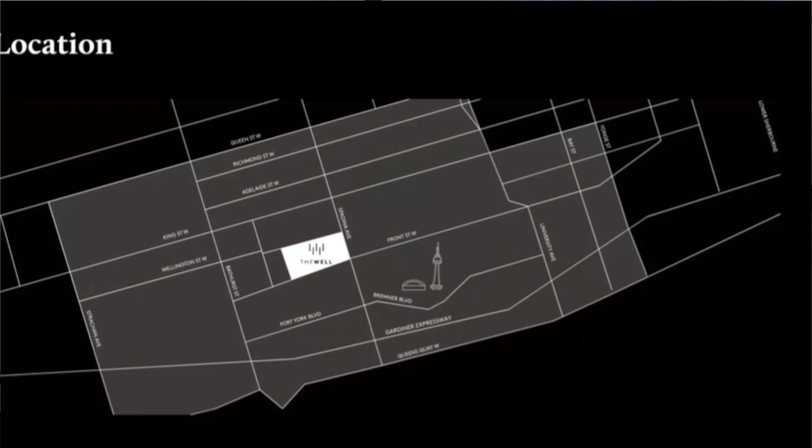That all ties into the amount of people that were involved to make this what it is, not just from an ownership standpoint, but also consultants; to make all this work together was incredible. So at a high level, The Well is located in Toronto, right at the intersection of Spadina and Front, just a little bit west of the main downtown core.

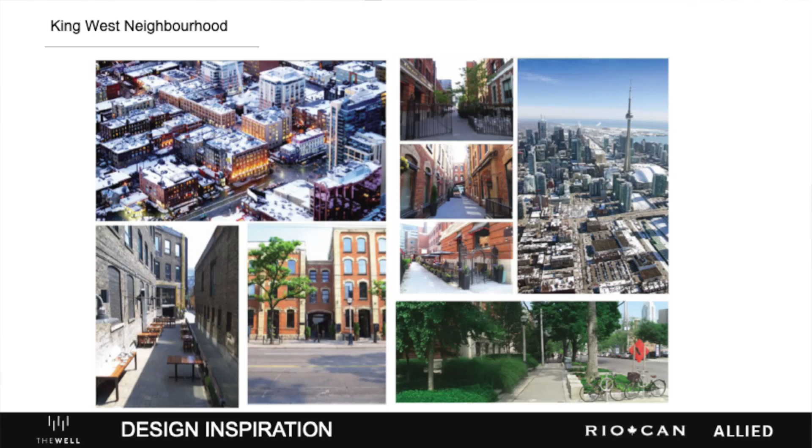The King West neighborhood is really defined by these former industrial blocks, hidden laneways, exterior terraces, this real post and beam type architecture. Our goal was to bring the flavor of this neighborhood into The Well, and The Well would act as a bookend for this neighborhood. We wanted to define exactly what we don't want to be. We were not the financial district of the city.

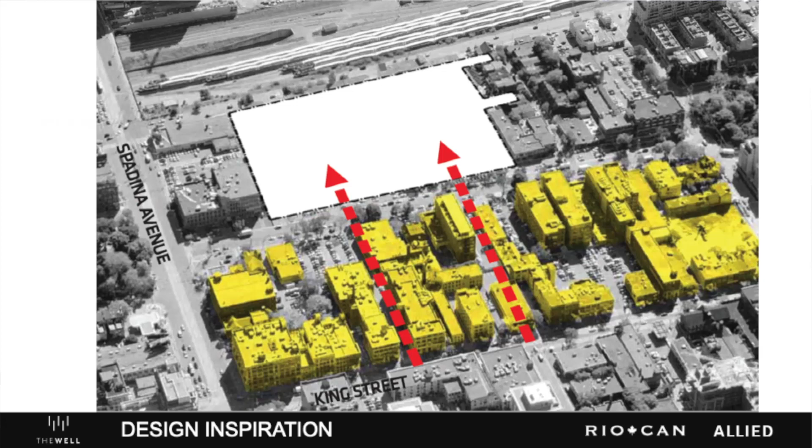This locale has a lot of character, and you could see it with the type of architecture in these buildings. So with all the little laneways, terraces and patios, we wanted to bring that all into The Well. And our goal was to not make The Well a community that's isolated in and of itself, but more of an extension to this King West community.

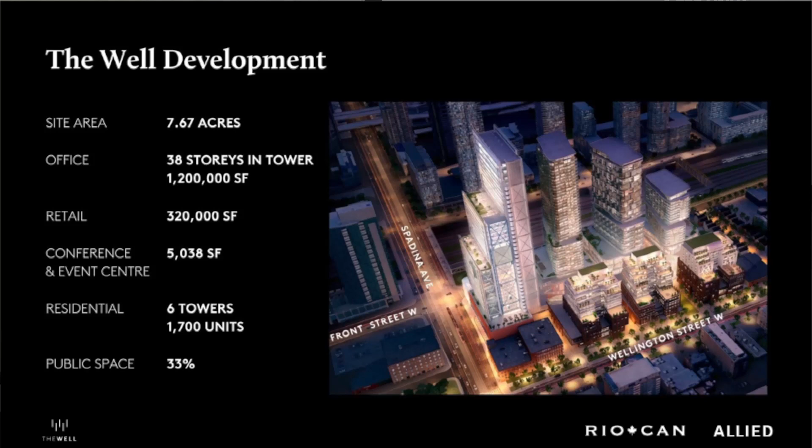Now, overall, it's a really large site. This actually, prior to what it is today, was the land of the Globe and Mail. They were a big publisher, a big newspaper out of Toronto. The land itself was almost 8 acres.

All the podiums that you see throughout the campus here are all commercial. On top of those commercial podiums, there are these residential towers. And you can see here, along this side, that is actually where King West comes right through and meets the Well. Along Wellington Street, those are more of the low-rise brick and beam style buildings. And as you move into the southern half of the site, you get into this open space where there's all the retail and open public realm.

So as far as the office goes, this large tower here on the very left is a 38-story office tower. All office, topped by a rooftop restaurant, actually. The retail area is 3 levels of retail, and I'll go into more detail on how that's all spread out, because there's 320,000 square feet of it, along with a 70,000 square foot market. And the residential piece of this is close to 1.2 million square feet as well, spread out between 6 towers. 3 of those towers are rentals, and 3 of those towers are condominiums.

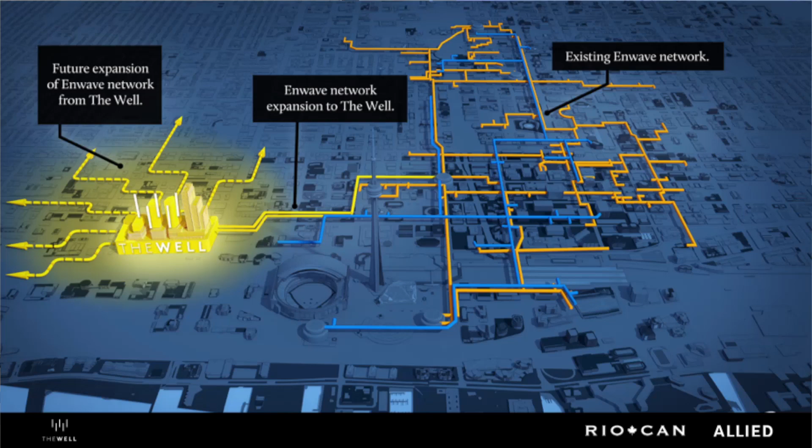One of the unique features of this site is we formed very early on a partnership with Enwave. Enwave is a utility in Toronto, and they service maybe 200 buildings now in the downtown core. They have infrastructure, and what they do is they have a deep lake water cooling system. So they have pipes that run 5 kilometers out into Lake Ontario, about 80 or so meters deep, pulling cold water from the lake to their plant, where it's then distributed and helps to cool a lot of the buildings around the city.

Now the Well, our partnership with Enwave acted as a western expansion to their entire infrastructure network. So there was massive work done with Enwave to bring their infrastructure west, and the Well acts as a node, a separate plant for Enwave for their western expansion. So within the Well, below the lowest level, there's another 180 feet down that we went, and it's a massive storage tank. It acts as a big thermal battery, and it will ultimately help to supply their future needs for expansion to other buildings.

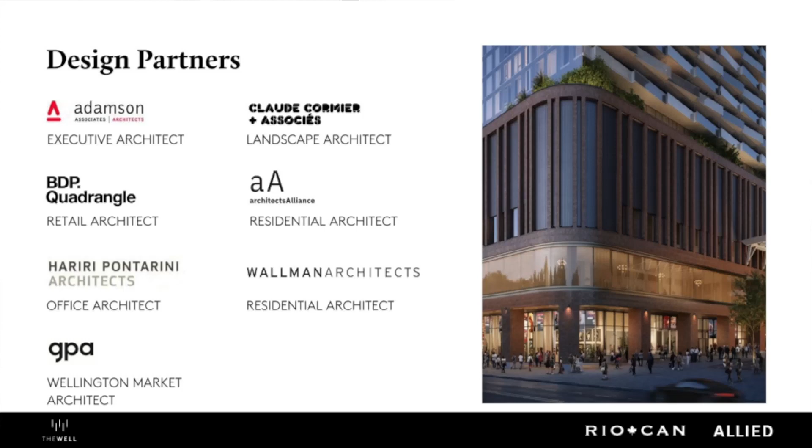So I mentioned earlier that it takes an army, and that's really what this was. The design partners that we teamed up with are really well known worldwide, actually. We had to kind of split this up in a way that made it manageable. The architect for the entire retail component was BDP Quadrangle. For the office it was Hariri Pontarini, and the executive architect was Adamson Associates.

The Wellington Market, so the 70,000 square foot market on the P2 level, that was GPA. And then Claude Cormier was the landscape architect, along with Architects Alliance and Wallman Architects for the residential buildings.

So just to talk a little bit about the office first. This building actually didn't start out this way. This building was more of a monolithic kind of structure. And when it was first presented, the city wasn't really on board. Just east of this site, there's a park, and it's a fairly large park right across from Spadina.

And the problem with the original design was the city didn't want us to block the sunlight on the park. They wanted to maximize the amount of time that we actually got sunlight on the park. So that's what actually led to the current design, where you have this kind of stepped building. And at the time, I'm sure we all go through this kind of stuff, it's like, oh, shoot, what is this going to do for us now?

As you go up the tower, from these mega floor plates, you go down to more manageable medium-sized plates of 30,000 square feet. And as you get these terraces, you step back and you go to 20, and then the smallest floor plate, you go to 10,000 square feet at the very top.

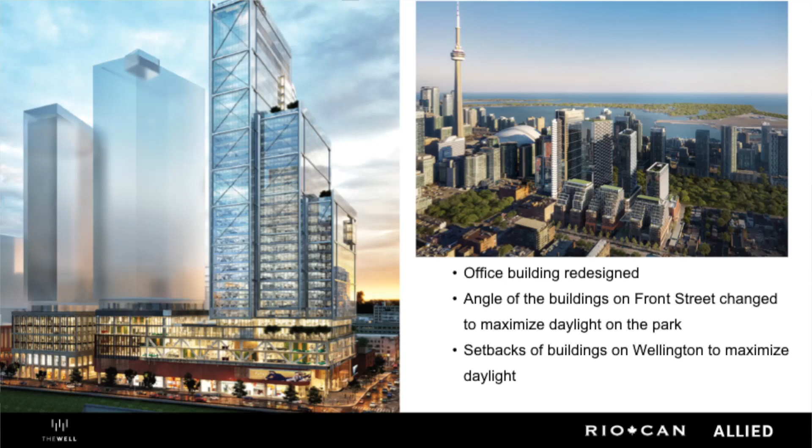And that also allowed us to have this restaurant at the very top, because not only is the floor plate a perfect size for a restaurant, they were also able to make use of the terrace at the very top as a patio, because we didn't have any equipment on the roof because of Enwave. We eliminated a lot of the chillers that we'd need, so that gave us a lot more usable area on the roof. So a lot of this really helped us with getting different tenants in the building, and now we're 98% leased. So we're well on our way, because this office building is open.

The retail was a little bit different. So this slide shows the kind of material selection that we went with, and that the design team suggested to us. And it was really important, because these are the podiums, all the commercial podiums. And if you look at buildings A, B, and C, those are along Wellington. That's where I was saying it kind of pulls the influence in from King West. Those buildings are this very rustic brick.

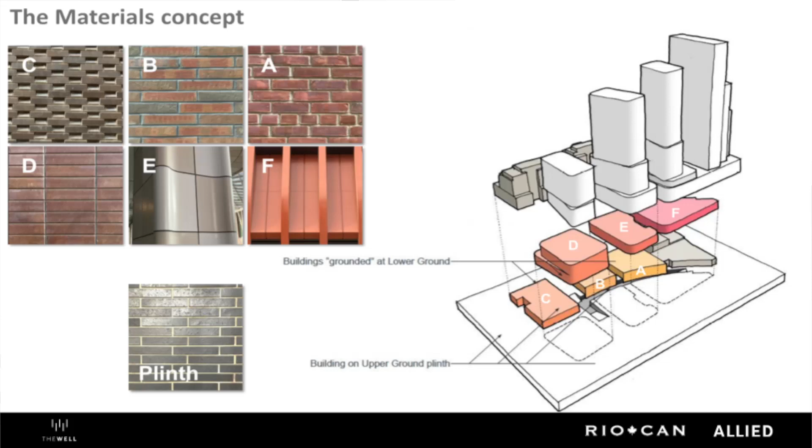And as you move west, into building C and then building D, you start to see it's more of a manufactured look. Building D was more of a precast brick. And as you get to building E, that's where the terracotta comes in, and that's this ultra refined type of style that we really liked. That was south facing, along Front Street, which was extremely busy.

It paved the way for these grand staircases that would come down into a courtyard, and you just see this massive building with huge arches that's full of terracotta, and we'll get to the exact photos of that building shortly here. The master plan of the retail also had a lot of intent behind it.

You could see that the placement of large anchor tenants with more medium-sized units to micro units was very well planned out, because it really pulled people in, having to kind of walk through these colonnades to get from one side to another.

So what you'll see here is those 3 levels of retail that I was talking about. The ground floor, which you'll see at the top right, pulls you in right from Wellington, right from Front, and right from Spadina Avenue, and that'll take you right through. There's these colonnades that go along the interior faces of all these buildings, and we call this the spine.

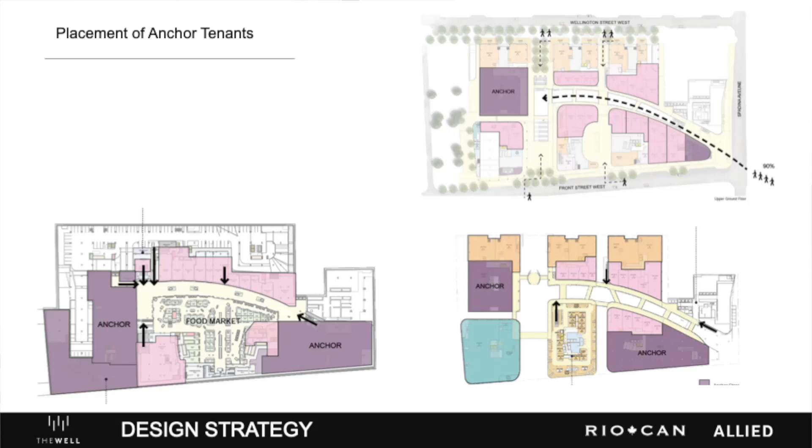And then there's a lower ground. This was a pretty unique space because it's the lower level. It doesn't get as much light. It's not as glorified as the ground and the second floor, and we figured not as many tenants would want to move down there. That's where the idea of the food market came into play. This is going to be all individually curated vendors. So there'll be the bread guy and the meat guy.

And along its perimeter, there's all these operable windows that open right into the spine, and it just spills out into patios. So it's a very European-inspired type of place. Above all of this is a massive 35,000 square foot canopy. That doesn't create a conditioned space through the spine, but it protects you from the elements. We share a climate here, so that really helps with making this a four seasons type of place to be, right?

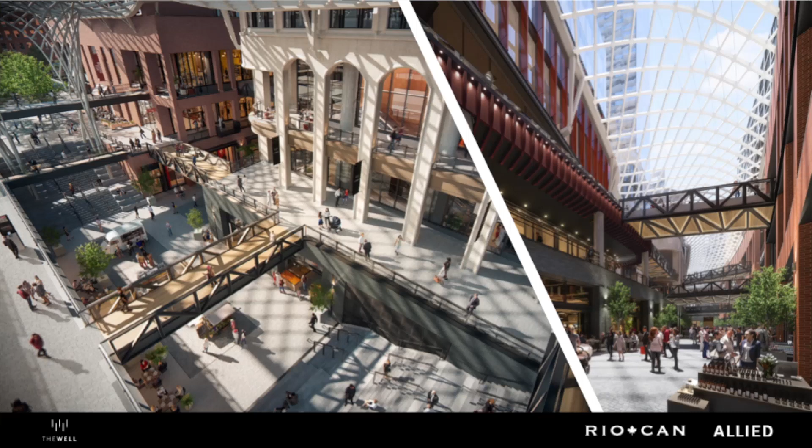These are a couple of renderings. This is the main courtyard. If we think back, that's Wellington. You come down these grand staircases with seating areas along the side, because this is all public realm, right? So this is not only going to be a spot where people come and work. People live and people also play here, because this is going to be activated in so many different ways, because we hold these assets long term, both Allied and RioCan.

We look for long-term value, and this was something that we really wanted to do. We didn't just want to build something that was single use, and we see that around the city sometimes. We really wanted to do something that brought people in, where people would want to be.

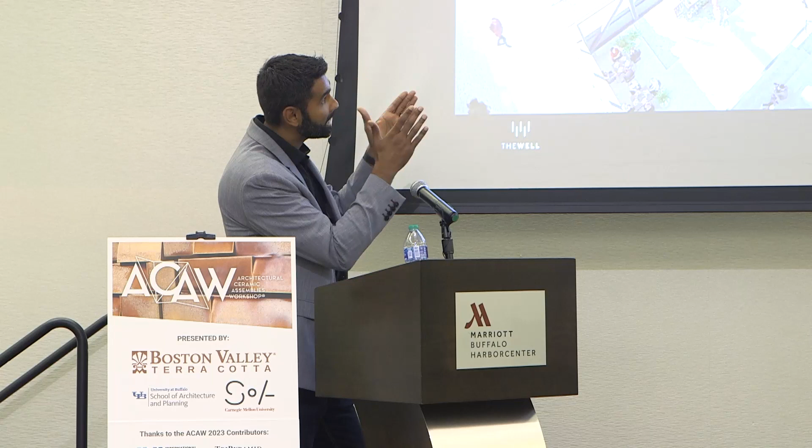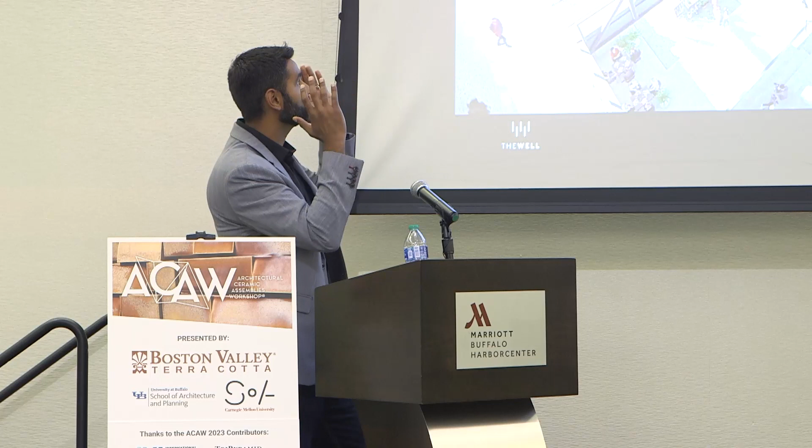Now you could start to see our crown jewel, Building E. This was a very early rendering, so you can see the arches that have taken shape, and the massive canopy in that rendering there. It spans the entire site. You could think of it as a big hammer: the handle goes all the way through to the front end where Spadina is, and right where this courtyard is, it breaks away and goes off to either side.

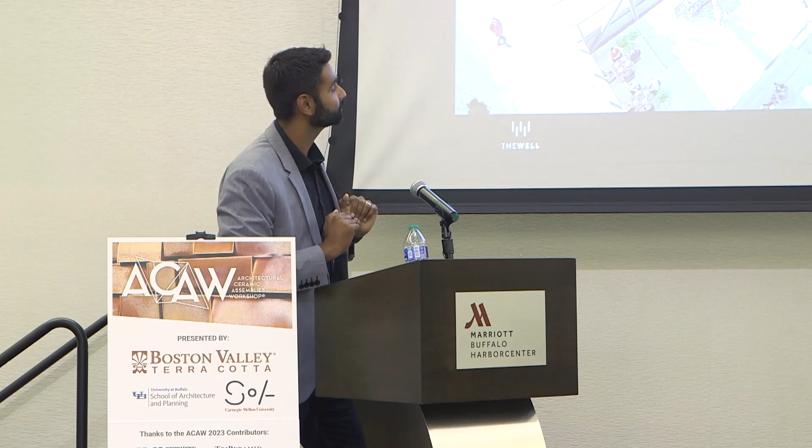When we thought about Building E, we really got our inspiration from this building. This is a separate building in Toronto at Queen and John, and it's beautiful. It's early 1900s, it's terracotta, and we loved it. This is where we told the design team very early on that we want something that is unique, something that is beautiful, and different, at least for us.

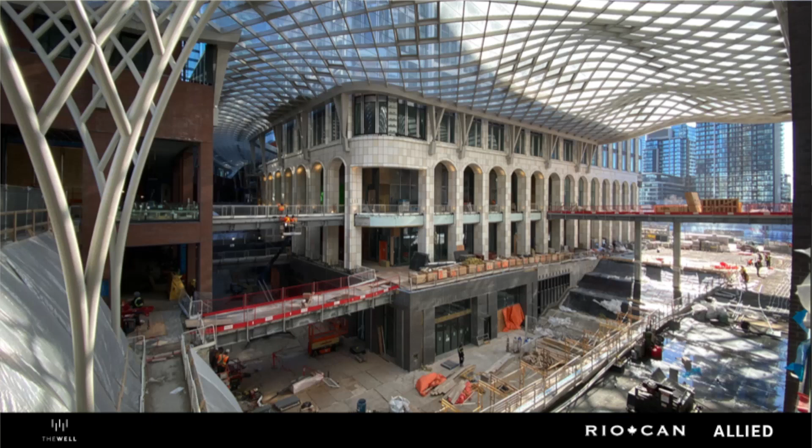What I've seen from my years at Allied is, we will pay for design where we know we're going to get the value in it. When we have a building like this, we will really pay for any design that can get us this, because we have 5-10 year leases. We're not looking at just one tenant. We're looking at multiple tenancies, and we're looking at creating a place where people want to be.

So this building here, this was maybe a couple months ago now, but this is Building E and how it's actually turning out.

One of the unique things about this building is that when it first started out, it didn't look this way. When we first started out, it was squared off. It wasn't as complex. One thing that we really pushed for was we really wanted to embrace the true nature of terracotta. We wanted the arches, we wanted the curves, because we felt that we didn't have enough challenges on the job. So we thought, let's take it a step further.

And actually, truth be told, when we were first looking at this, we didn't know if it could actually be built. So that's where I think there was a lot of coordination and a lot of assistance that was required through the Boston Valley team. We knew very early on that this is the way that we wanted to go. And we knew very early on that this is going to pull people in, because when you come into the site, this is the first thing you see.